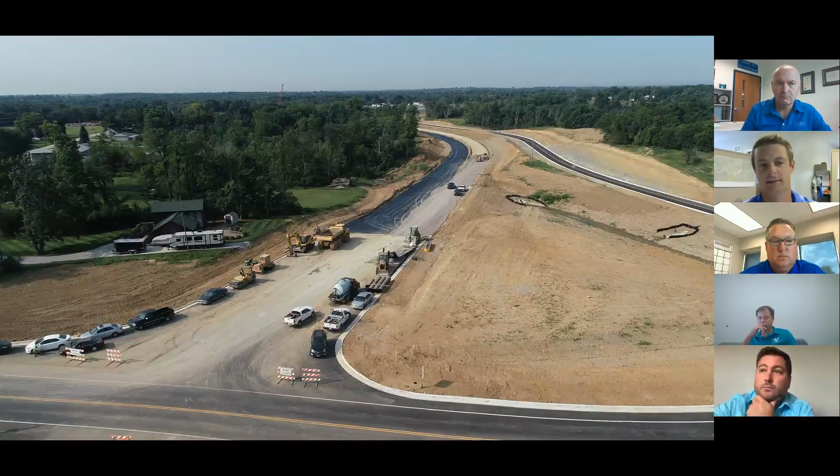For some reason, I'm not seeing a video with your bios playing, and that's what's typically playing at this time. I'm not sure what's going on. Has the music stopped playing?

I'll give everybody a few more minutes to join if they were planning on attending this session. So my iPad just froze up. You guys still hear me? Yes, gotcha.

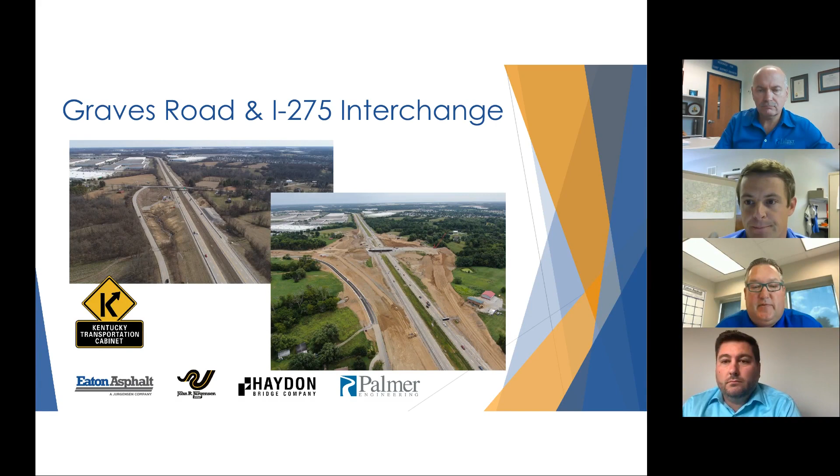Thank you, John. This is Mitch Crump with Eaton Asphalt, and I'll start off first. Thanks for allowing us to present today on the Graves Road and I-275 interchange.

I guess to get going, I'll explain the why of the Graves Road and I-275 interchange project. The picture on the screen, top left, is existing Graves Road in late 2019, which shows a good reason why Graves Road was selected for the first design build job in Northern Kentucky. In the top left corner, you can see all the industrial area with the big box warehouses. Also to the top right, the CVG Airport is located within 3 to 5 miles of this project.

The Northern Kentucky area has experienced rapid growth over the last 3 to 5 years. The Cincinnati Northern Kentucky Airport is one of the fastest growing airports in the nation, specifically for cargo. As a result, infrastructure upgrades are required to handle the increase in truck traffic and increase in population. The Graves Road interchange will be a major upgrade that will improve mobility and safety in this area.

Back in March of 2019, when this job was advertised for bid, we had to take a look at it as Eaton Asphalt and understand this project. The first item that we undertook was looking at the big risk factors. First and foremost, there were two on this project that were a big challenge to Eaton Asphalt: one was right-of-way acquisition, and two was utility relocation.

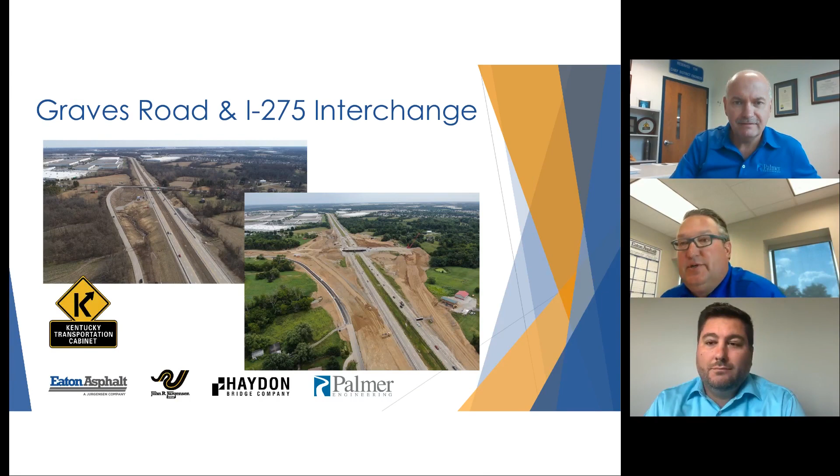I guess to put it best, back in spring of '19, the Design Build conference was held in Cincinnati, Ohio, and one of the presenters said the worst design build that you could get involved in had right-of-way acquisition, utility relocation, and was politically motivated. So it was a major undertaking, to say the least.

With that being said, we were excited to take this task on and submit a bid for this project. Eaton Asphalt selected two dedicated subcontractors, John R. Jurgensen and Haydon Bridge. Not only had Eaton worked with both companies, but they also brought design build experience to the team. The other half of the equation was the design engineers.

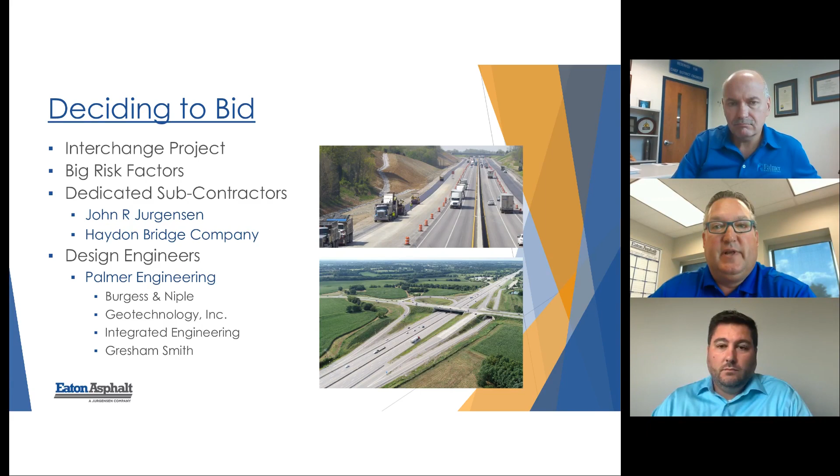Eaton Asphalt selected Palmer Engineering as the lead designer, with Burgess and Niple, Geotechnology, Integrated Engineering, and Gresham Smith filling out the design component. Kevin, or Josh, I'll turn it over to you.

Did we lose Josh? Is Josh there? I think we might have lost Josh.

Good afternoon, everyone. If Josh comes on, I'll hand it back to him. For those looking at the screen, it's pretty obvious that I'm not Stephen Sewell. I'm Kevin Dameron. Stephen was the design project manager for this project, and he led the job, but unfortunately he had a conflict that came into place after we set up the time for this presentation with the City of Lexington Planning Commission. He's still hopeful that he might be able to drop into the presentation. But let me just say this: sometimes we offer new and improved. I think I'm the old and the non-golfing version of Steve Sewell. So I will be doing Steve's portion of the presentation.

For the statement of qualifications, this was an area much more suited for the typical design process where we do proposals, and we helped lead that for Eaton and Jurgensen on this project. What was critical was to get the project manager, the right-of-way and utility managers, and the structures and construction managers, get those task leads assigned, and work on similar projects to start assembling the proposal and get shortlisted.

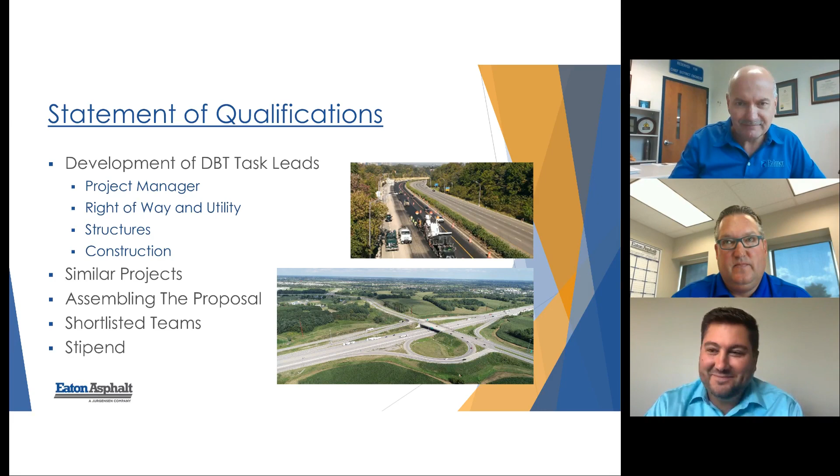As I said, the key thing was to assign key task managers, not only to lead the project.

Let's see, I got a text, but it wasn't from Stephen Sewell.

But not only to lead the project, but also in preparing the SOQ and the technical proposal. So we had Stephen Sewell, the design project manager. Ray Robinson with Burgess and Niple was the roadway task manager. Brad Robinson was the task manager for structures. Bill Bassage with Geotechnology led the geotech work. David Waldner led the environmental. Keith McDonald led right-of-way, and I led the utility.

I led the utility coordination, but the utility issues were so complicated on this project that it was a teamed effort with Ed Sanders of Jurgensen and Eaton Asphalt. We worked together on that.

From a design team standpoint, our task was to put plan quantities together. We needed to do appropriate engineering work so that Eaton could bid the project. You needed to get just as much done as you could, but on the other hand, you wanted to make sure that you didn't go too far, because once again, you were limited on what funding you had. So once we had the quantities put together, we would provide those to Eaton, and then they would either price the quantities or turn to their subcontractors.

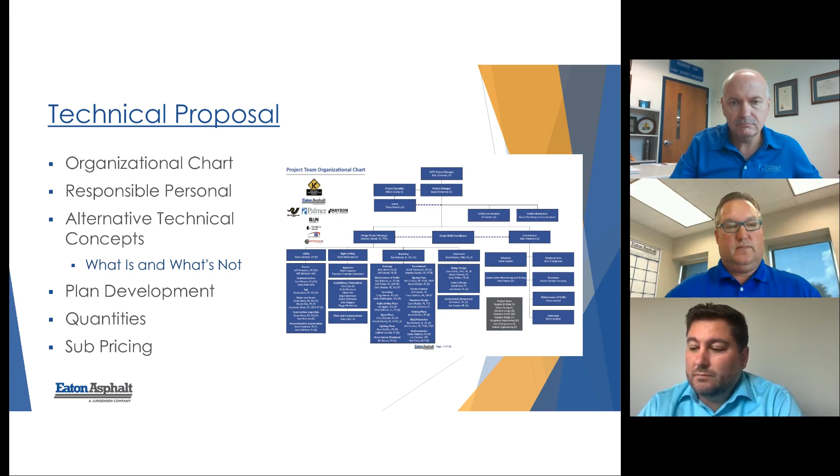One of the things that was positive with this project is KYTC was open to alternative technical concepts, and they allowed for meetings to take place between the design build team and KYTC. We could notify them in advance of what issues we wanted to talk about, including if we had an alternative technical concept that we wanted to present and discuss. In developing the project, we came up with a list of alternative technical concepts. We basically proposed an alignment shift of Graves Road tied to our interchange layout, but it also enabled us to improve upon the maintenance of traffic. By shifting the alignment of Graves Road, we also shifted the Kentucky 20 intersection.

On the other end of the job, there was a roundabout, and we had some ideas of what to do for it. One of the alternative technical concepts we had was with asphalt pavement. One of the things I want to point out is Eaton Asphalt was the lead contractor on the team, not Eaton Concrete—it's Eaton Asphalt. So with our design build team, we just thought it would make good sense to change the pavement design on the project for I-275 from concrete to asphalt. And the cabinet was receptive to that.

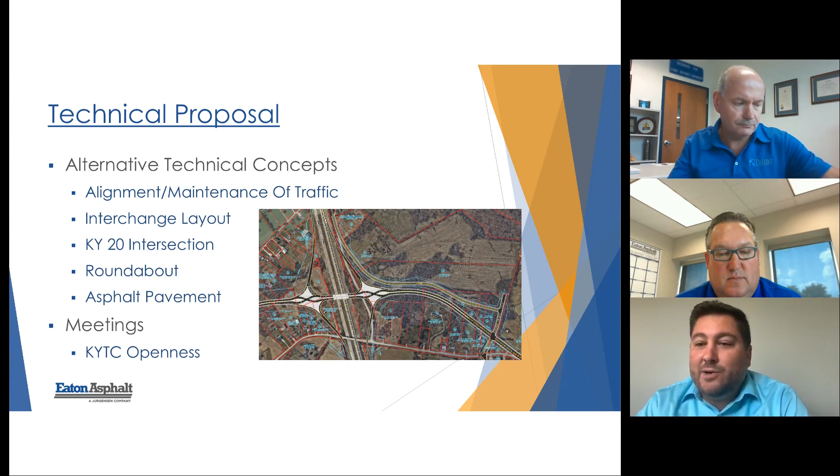They had the appropriate discipline there. I don't know, Brandon, is there anything you want to comment on as far as the ATC process? Sure, I'll point out that I wasn't actually part of it. At the time we had a different project manager. I took over as project manager once the project was awarded.

But I've been filled in on most of it. I think it was really important for the cabinet to be open and willing to listen to all the ideas of each of the candidates putting together proposals. We viewed this as a collaboration. We didn't want this to be standoffish. We wanted to collaborate with all of the candidates and make sure we were working to get the best project we could. In the end, I think that benefited us, and it really helped develop the working relationship that we have with the current team.

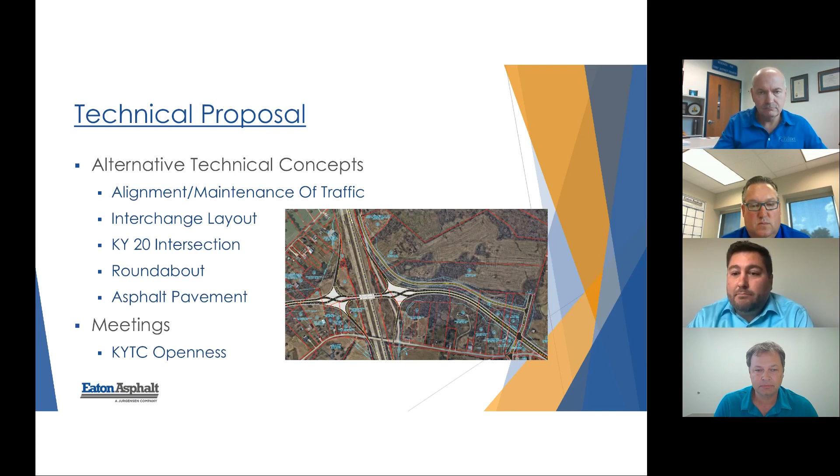Okay, so to go into a little more detail of the alternative technical concept, one thing we did was the interchange configuration. The project was proposed with more or less a partial cloverleaf interchange. When we were looking at it, we came up with the DCD design, and that reduced the earthwork for the project, improved traffic flow, reduced the bridge width, and involved less pavement. I think the cabinet was agreeable to that, and we were able to proceed with it. Mitch or Josh, anything you want to comment on that one?

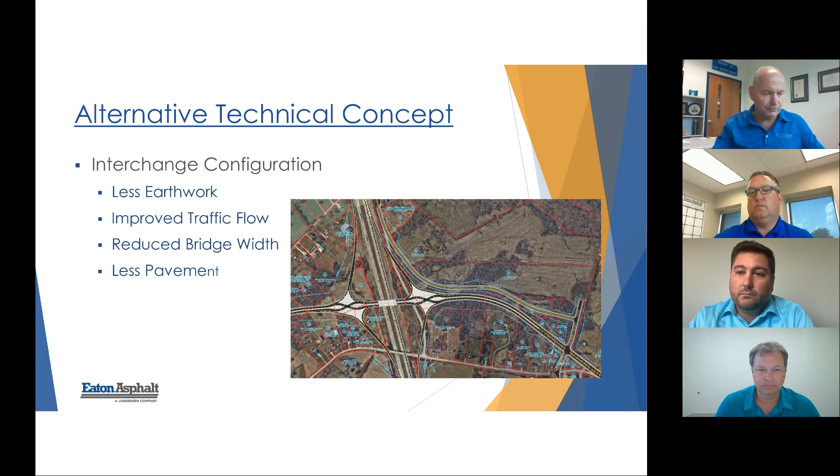You're good, go ahead. And then, of course, the alignment shift for Graves Road was pretty significant. The original design came in more skewed to the intersection with Bullittsville Road, and it required rebuilding Watts Road and Graves Road at the intersection. One of our ATCs was to change the intersection with Kentucky 20.

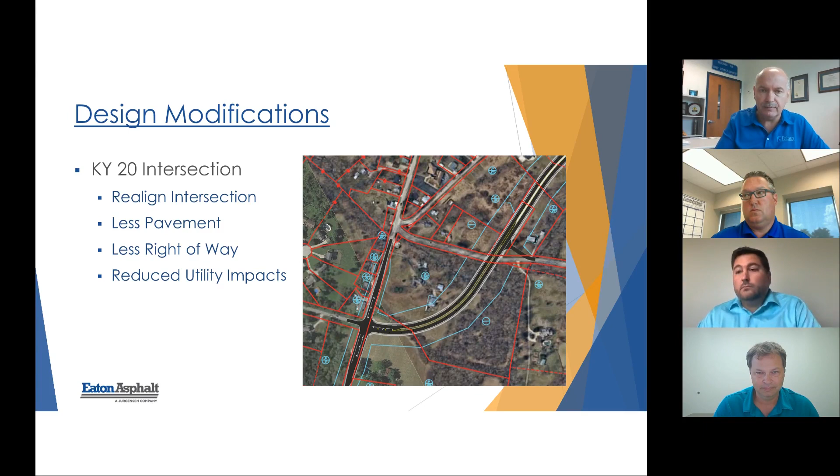If I recall, I don't even think that had to be approved as an ATC. I just think we presented that as part of the project. The cabinet felt we were maintaining an intersection with Kentucky 20, so it wasn't actually an ATC to be approved. But it tremendously realigned the intersection, involved less pavement, and significantly reduced the right-of-way impacts because of the changes with Watts Road and Bullittsville Road. It also significantly reduced the utility impacts, especially by avoiding the SD1 pump station near the intersection of existing Graves Road.

And then I've already mentioned the roundabout on Kentucky 237. We looked at multiple alternatives there, and we ended up deciding it was best to shift the roundabout just a little bit south of the existing location. It's still on top of the existing location, but shifted slightly south, and it will be easier to build the project while also maintaining traffic. We were still able to meet the cabinet's goal of increasing capacity in that roundabout, and once again it reduced the right-of-way.

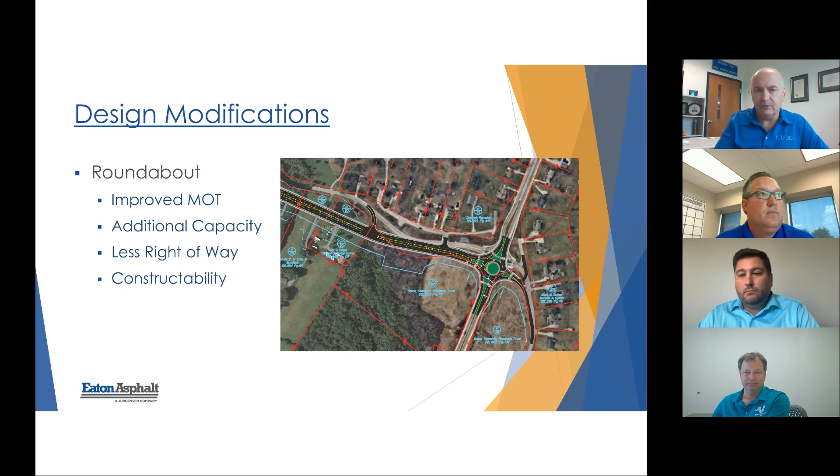Keith McDonald led the right-of-way acquisition process. For those who just left the Calloway County project, he was buying Calloway County at the same time he was buying Graves Road, so he was hustling. We started out with 81 parcels, that's what the cabinet advertised with the project. As we modified our design with the DCD design, we were able to reduce impacts to only 61 total parcels, reducing 20 parcels in the process.

Now the priority of the project was to get the interchange constructed, and those parcels involved 22 parcels. As Keith McDonald always referred to them, buyable units - while we were talking buildable units, he was talking buyable units. So his first buyable unit was the 22 parcels tied to the interchange project. We were responsible as the design build team for obtaining the titles and appraisals and the closing attorney. One of the things significantly different with this design build project is the cabinet required the design build contractor to contract the fee attorney.

So not only were we responsible for having the fee attorney work for us, we also had to pay the fee attorney. More importantly, we had to estimate how many condemnations may be involved with this project as we put the price together for the services. To my knowledge, the cabinet's never done that before, and that was a high risk in the process.

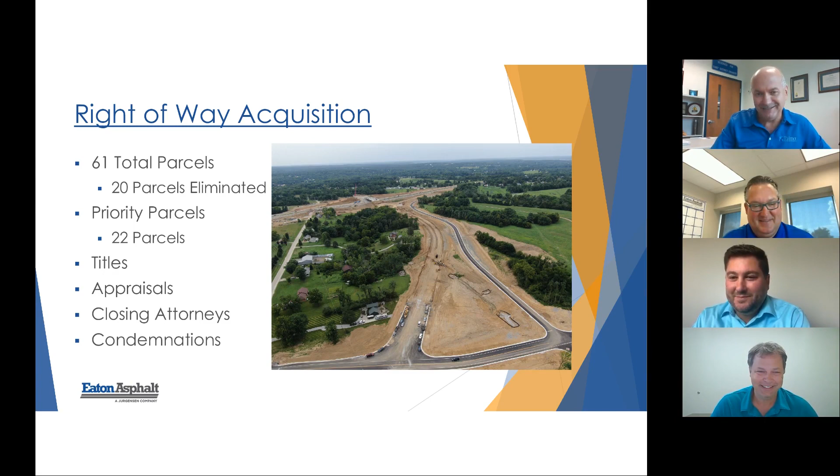As I pointed out, I was in charge of the utility relocations with Ed Sanders. There were 8 major utility companies, and that was one of the bigger challenges with this project. If you drive out there along Graves Road, you see the substation in the photograph toward the top of the page, and that's the pump station for SD1. At the bottom of the page you can see there were some serious utility issues that we had to work around.

And we were able to greatly minimize the utilities with our design changes. But one of the things I want to point out that was key to this project, from my standpoint on the utility side, and I think it's true from the contractor side as well - District 6 and KYTC did a lot of work preparing for this project.

When we basically just started looking into the project in the beginning, we met with all the utility companies, and all of them were very aware of this project. All of the utility companies had already met with KYTC - Bob Yeager, Rob Franksman, Mike Bezold, Tony Blau, Dane Blackburn, Carol Callan Ramler. They had already done a lot of legwork on this, and the utility companies understood that this project was going to come at them hard and it was going to come fast.

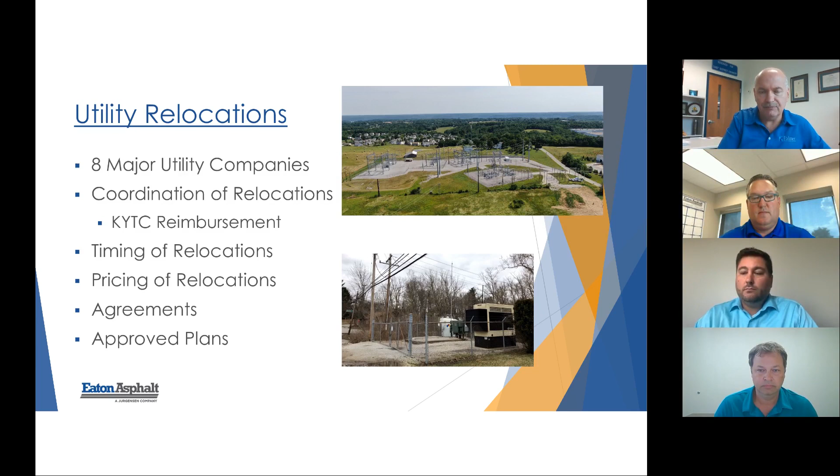The cabinet required that agreements be written between Eaton Asphalt and the utility companies. This basically bypassed the entire cabinet utility process. It still came back, the cabinet had final approval, but we had to develop agreements with each of the utility companies before the utility work could begin out there with approved plans.

The photographs you see, both of them, show some of the things we had to do with the project. There was a massive jack and bore underneath I-275 that Palmer Engineering designed. Stephanie Blaine at Palmer led that activity, doing all the grunt work. It was a 42-inch steel encasement pipe.

We designed it for Cincinnati Bell, we designed it for Spectrum, and we designed it for Owen. You can see just how many conduits we had to have in place for all the fiber to run through that.

One of the things about the importance of teaming: obviously everything we did in the development of the design for utilities came back. This is why Ed Sanders was involved with Eaton. We not only designed it on paper, we also designed it to make sure it worked out in the field, constantly making adjustments to make sure that what we were proposing would actually work.

And Mitch mentioned this yesterday, everything worked well until the 9th hour. We actually had the steel encasement pipe in the ground, we already had Cincinnati Bell in the pipe, and Duke was getting ready to go to work there.

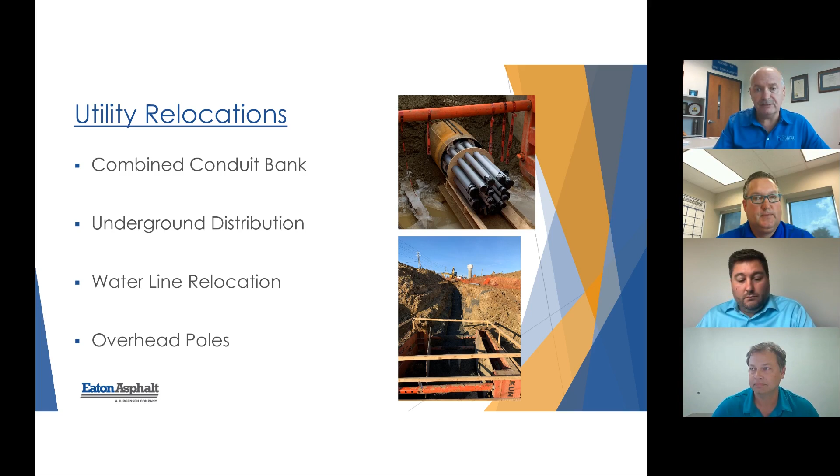The environmental process was led by David Waldner. Fortunately for this project, all of the environmental was already approved by the cabinet. There was already an environmental document, and all we needed to do was update the permits, and also the area of impact, the area of potential effect.

There was a slight change that we had to work through with KYTC and FHWA through a reevaluation of the environmental document. One of the key things is that we saved the cabinet money by reducing the in-lieu fees and also by reducing the impacts to the bat habitat. That's one of the changes we were able to make with our interchange ATC.

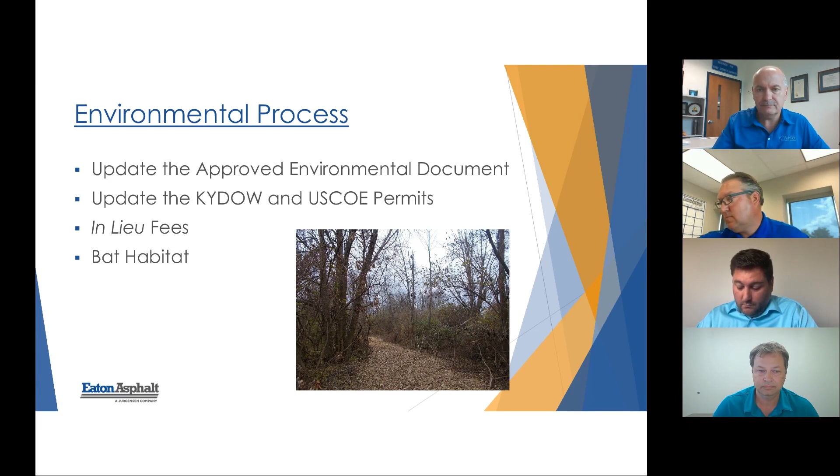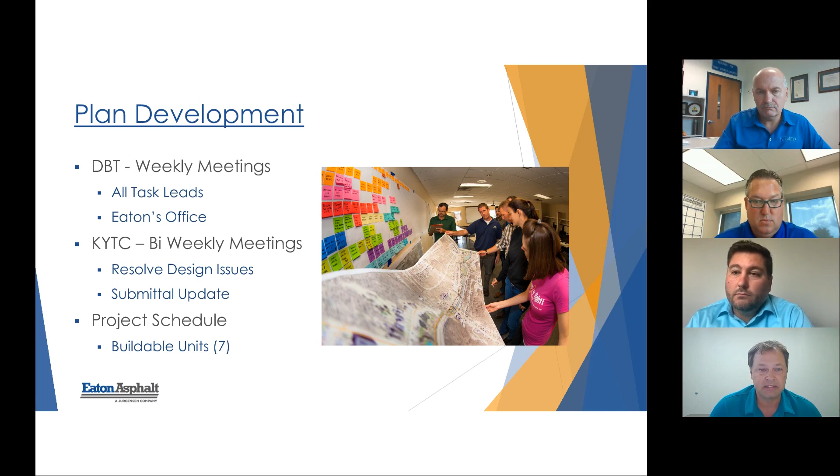Yeah, from the cabinet's perspective, those weekly, bi-weekly meetings were really important to keep that continuity going. Once we got to construction, it felt like a giant hurdle, but then we realized we still had to build the whole dang thing. So that's the unique part about this, is every time you hit a milestone, you realize that there's a lot in front of you still.

This is a pretty unique project from a construction standpoint for us, in that we went with 100% consultant CEI, so construction administration and inspection services, and we have a really good firm on board. WSP is the lead firm for that. We've used consultant inspection before, but it's really been through our master agreement, kind of on a rent-a-tech basis, to supplement our own staff.

We haven't really turned over an entire project administration in District 6, at least, to a consultant. So that's definitely been new for us. So far, so good. They're doing a great job, and I think we found a really good balance working with them. There's a lot of other really unique aspects to it, though.

Probably the most unique is that this project was bid as a lump sum project. However, we're still required to produce a schedule of values, and we still have to figure out a way to track all of our material testing and sampling requirements. So to do this, we have a real project that we run estimates on that's a lump sum project, but we also have what we refer to as our tracking project that breaks down all the individual items similar to what a normal project would look like.

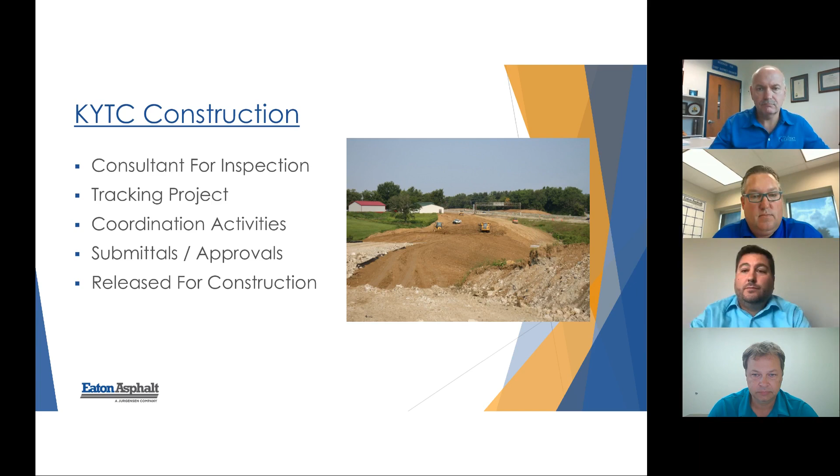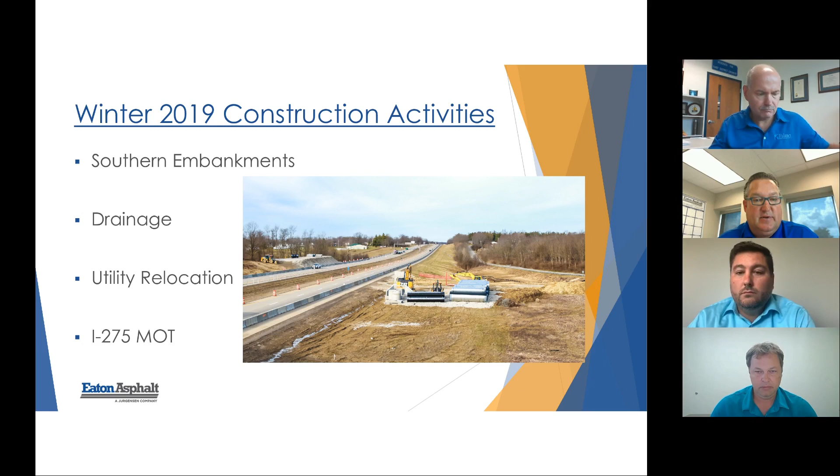Once the project was awarded in September, October of last year, we had some major points we wanted to get accomplished before winter set in 2019. Number one was to build the southern embankments so we could get our dedicated subcontractor, Haydon Bridge, started on the south end abutments of the bridge. We also were working on storm drainage, and it was very important for us to get the jack and bore in the ground, so once spring of 2020 came, we could start on utility relocation. Last, we took I-275 and got it into phase for the spring construction activities.

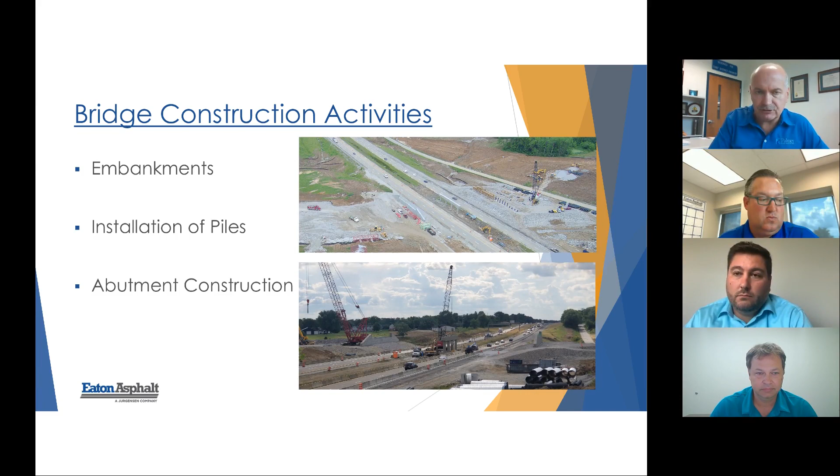Haydon Bridge was able to get started out there basically, I think in 2019 or early 2020 -- that's a question to Mitch or Josh. The key was, like Mitch mentioned, to get the embankments constructed on the south side. Once that embankment was constructed, Hayden was able to move in and start driving piles there while the embankment on the north side of the bridge got brought up. Once that was done, the abutment construction followed suit.

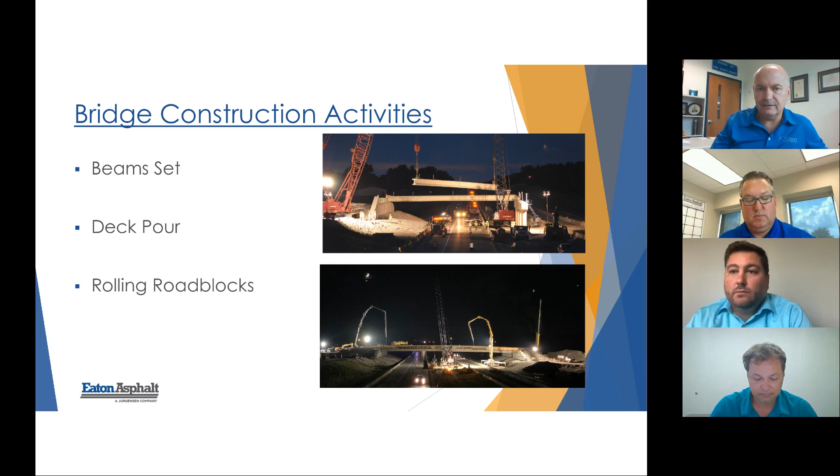So here you can see the beams being set in place. The picture at the top of the screen, the beams were set in June, and the bottom screen, those were set in July. The deck has been poured, and basically everything -- let's see, I think I got one more picture of the bridge. Yeah, the bridge is just about complete out there. We're just working on the railings now.

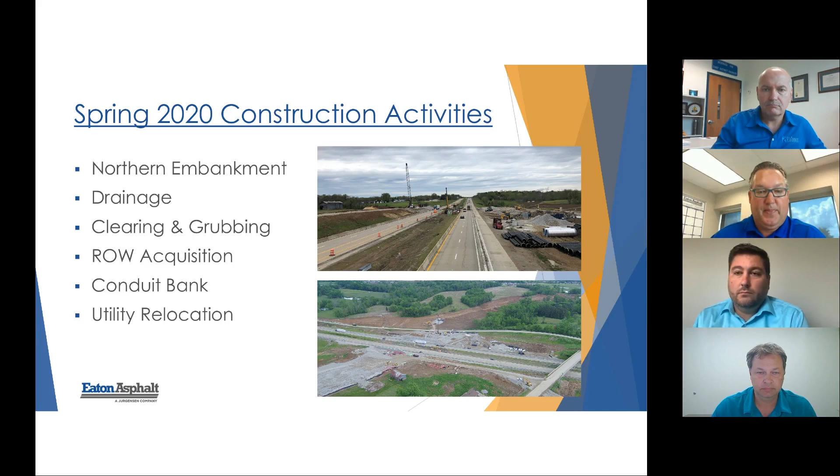Then once March came, we were hit with the pandemic of COVID, and it basically changed our whole normal process, as meeting face to face was no longer allowed. I think the tone was set at the beginning of the ATC meetings, with the openness with KYTC. That was very good, and it enabled us to move into Zoom meetings with everybody at home. It's still today a tall task, but we are muddling through it.

As we continue, we have a virtual plan review and virtual construction status meetings, and Brandon, you might want to talk about the construction activities and material standpoint from WSP's perspective.

Yeah, it certainly presented some unique challenges. All of our normal progress meetings that we have near site are done via Microsoft Teams or Zoom, along with our plan reviews. But also, we've moved to contactless ticketing and sampling. Normally we have our inspectors in the field taking a rock ticket or something directly from the truck driver, and we've got our record -- we're not doing that right now. So now we're working with Mitch and his guys, with their producers and vendors, to get e-ticketing implemented so we don't have that extra contact. COVID has just added so many more layers to this. In a lot of ways, everybody's done a great job and really thrived throughout this, figuring out very quickly how to adapt. But it certainly added a lot more to everybody's job now.

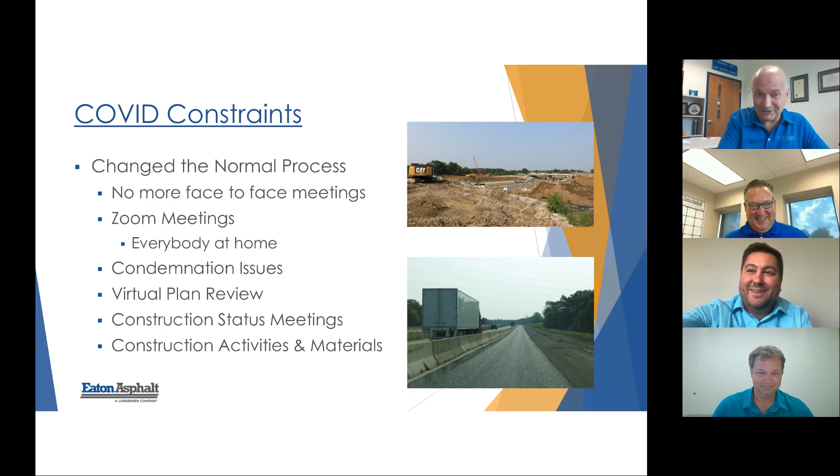As Kevin mentioned, we had our summer 2020 construction activities, and you can see in the pictures on the right is Graves Road, the new alignment of Graves Road. So we continued grading and storm drainage installation.

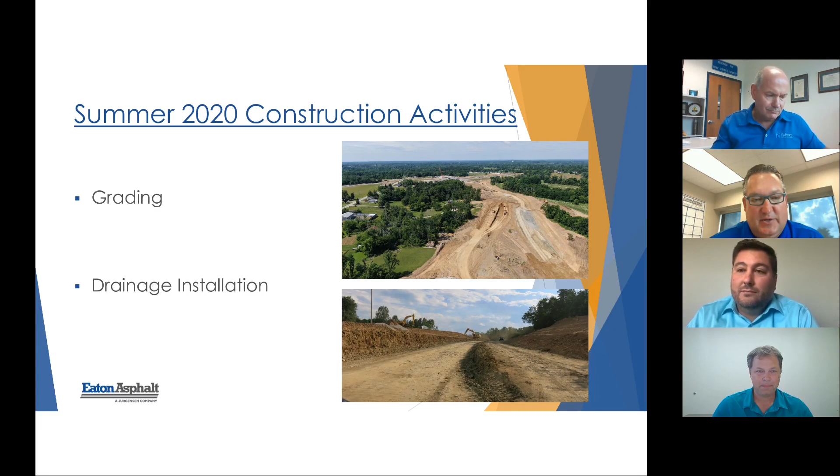The next slide—I'm sorry, Kevin, go back one. Oh, okay.

As Kevin mentioned, the major key component of getting this new alignment was relocating Williams Road. As you can see in the picture to the right, Williams Road is relocated now, so we were able to put the fill in over top of the existing Williams Road and connect the dots from the bridge north. Also, a major component of this project is I-275 widening. We were adding auxiliary lanes on I-275 and then the ramps that will connect in eventually.

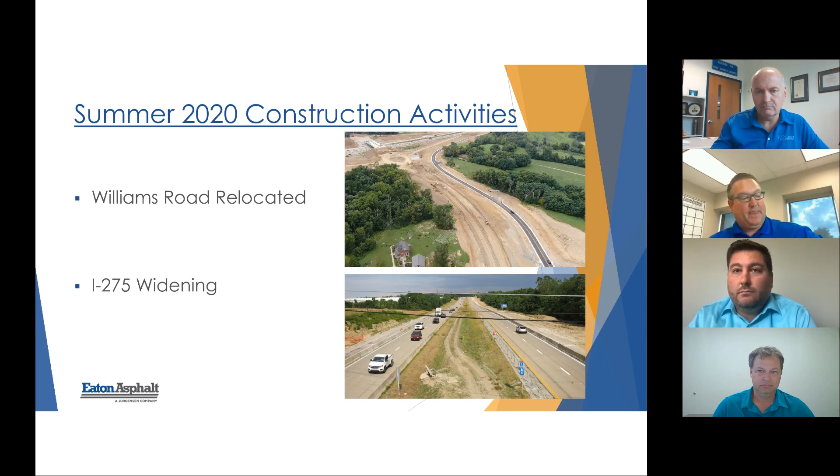I guess to wrap up, we'll all share this slide. What we have learned, as we mentioned, this job was advertised in March of 2019, and we began having weekly meetings soon thereafter, with roughly 15 to 20 people showing up every week, coming from Winchester, Springfield, Lexington, Ohio, and Kentucky. So there was a lot of commitment from everybody I mentioned earlier in the first slide, from Eaton, Jurgensen, Haydon Bridge, Palmer, Burgess and Niple, Geotechnology, Gresham and Smith, and I might have missed one more, but Integrated. So everybody was very involved from the get-go.

What that led into, I will say, was a different perspective for me being the prime, Eaton Asphalt. Generally, when we're bidding a hard bid build job, it's advertised 3 weeks prior, and then we submit a bid. Whereas now we've been working on this project for roughly 8 to 9 months. So for me, there was that fear of letting the team members down, because everybody had put so much time and invested so much time and energy.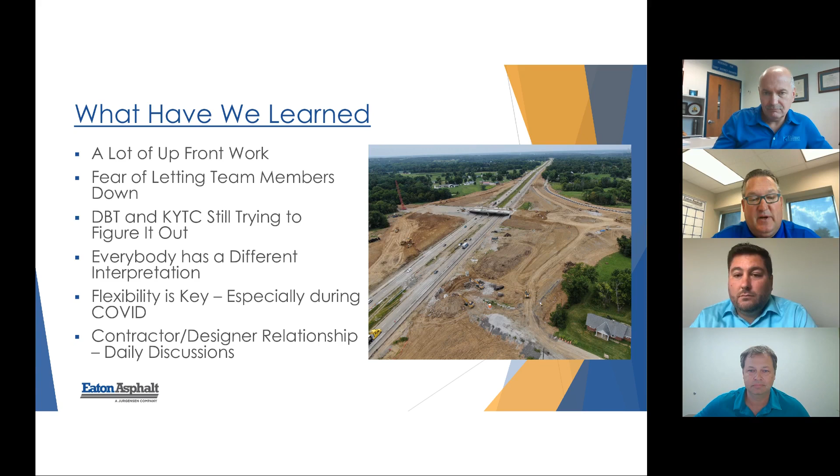I'd piggyback on that. It almost should be like a tribe venture, contractor, designer, and owner. Just because we have a Wednesday meeting set up at 1:00 with the whole team doesn't mean we don't talk with Brandon or Stephen. If it's not daily, it's every other day at least. It's been a very good and rewarding experience so far.

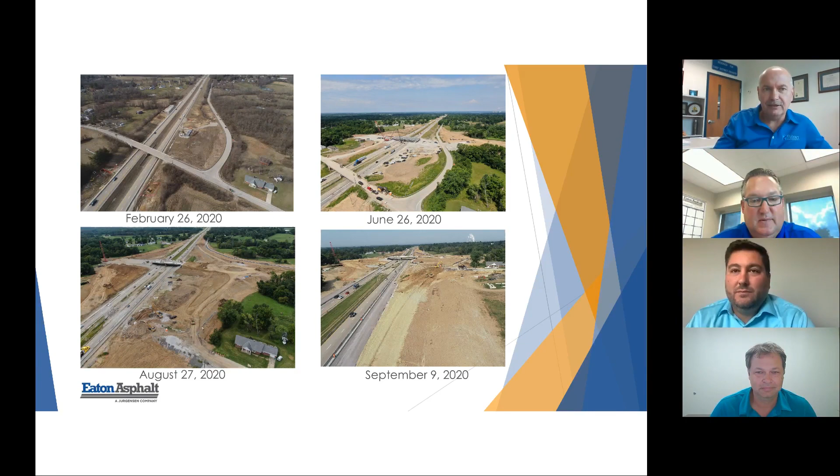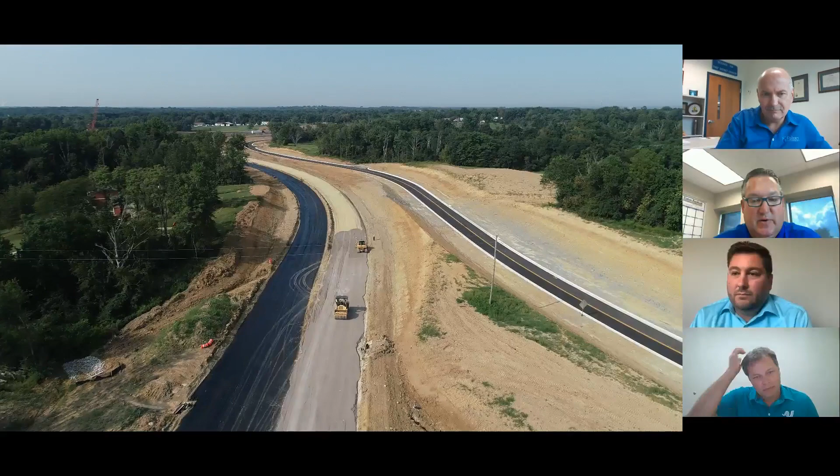Now, I don't know, it may end up being jerky, but basically we're on the northern part of the job right now. Currently Worldwide is below you, and as we head south, Graves Road is on your left and Williams Road is on your right. It should take us south to I-275.

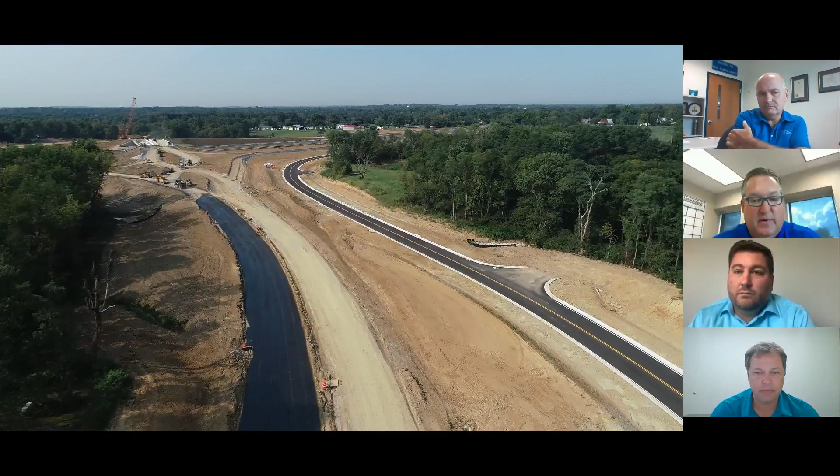It might take a little while, Kevin. We'll see if it loads fast enough to play. You can see currently we're installing dense grade aggregate on Graves Road, getting ready to lay drainage blanket on Saturday, and then hopefully curb installation first of next week.

Seems pretty slow, Kevin. Well, we've got 10 minutes.

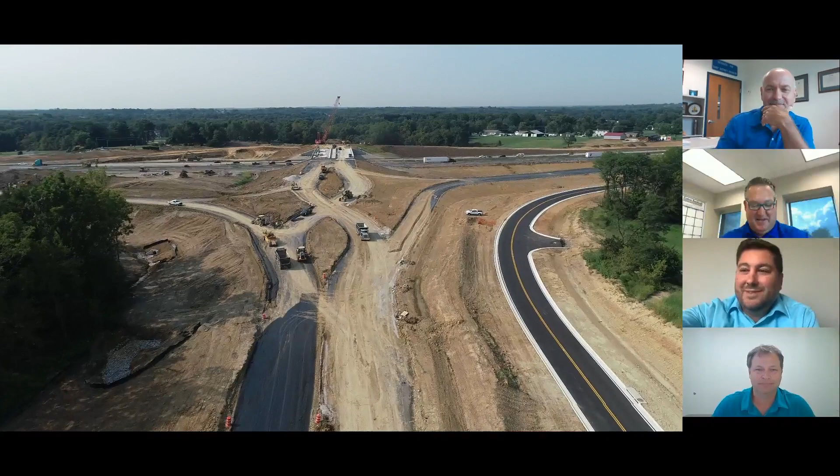Brandon, do you want to talk about the incentive area?

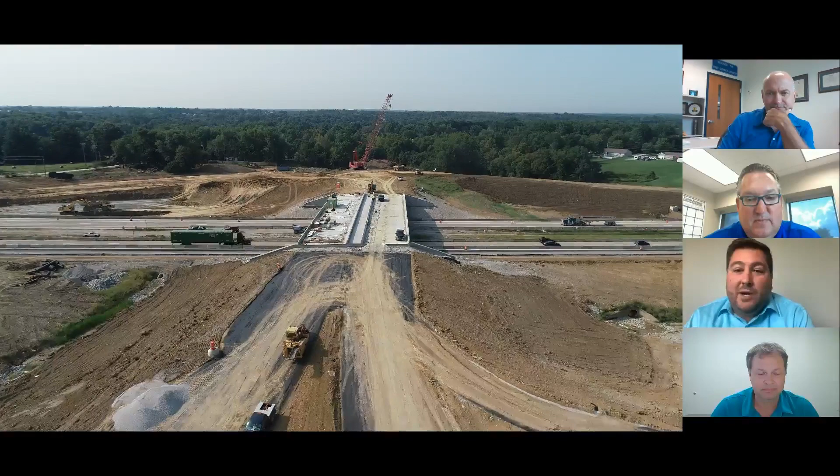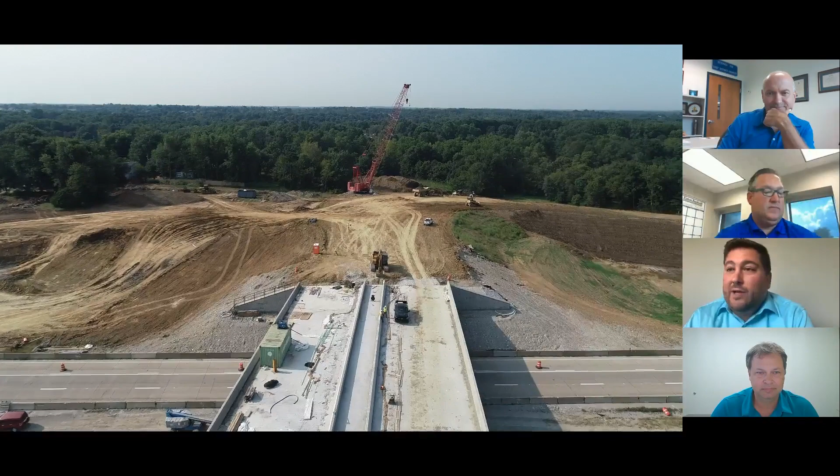I'll just briefly mention that one of the other unique aspects of this project is that there's an incentive to get the interchange open by this fall. So if it seems like all this stuff's happening fast, there's a reason. This is a highly commercialized, industrialized area, also highly developed residentially, and anybody that's driven knows a bunch of semis and people trying to go to work and school don't always mix well for traffic. So it was very important for us to try and get this opened in a timely manner, particularly for all the people that live and work out there.

So we do have an incentive to try and get this thing open by this fall that they're working very hard for, and you can see the progress and how quickly that it's going.

I do see we have a question about how we're tracking the budget. I mentioned earlier, we have kind of two sides for this. We have our real project that's paid via the lump sum, but we also have a tracking project that has a schedule of values, which is Josh and I's favorite thing in the world. It's been a challenge, but essentially it's set up like a normal project would be with all the unit bid items and quantities, and that's how we track it for pay estimates and for keeping track of material certifications and samples. Our inspectors in the field keep track on the tracking project, and we produce a progress estimate from that. Then we pay that amount on our real project as a percent of the lump sum.

I think the rest of the comments, I feel like we've had cheerleaders basically cheering us on. Let's just say it's something like that. Any other comments, gentlemen? We can kind of talk our way through this slow video because I think eventually we're going to see the whole job. Andre just needs to stop heckling us. He's giving us some congratulations now, Brandon. Thanks, Andre.